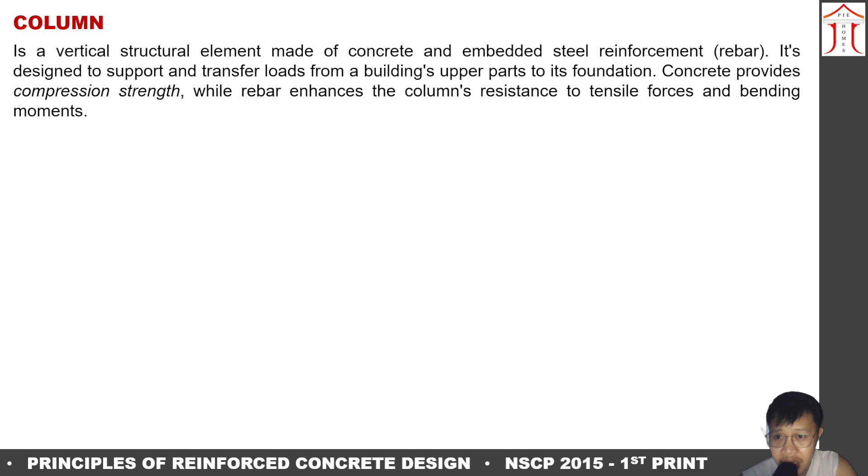Technically, ang column is actually para lang din tong beam, kaya lang vertically naman siya na-align. Just like beam, nakakaranas din ito ng mga tensile forces and bending moments, kaya kailangan din natin itong i-reinforce with rebars para mas maging ductile, para mas magkaroon siya ng resistance sa mga forces na ito. So, there are three common types of failure sa column.

First, we have the compression failure, or minsan ito'y tinatawag na pure compression failure. Kung mapapansin natin, ang column ay nakakaranas ng mga vertical forces, mula doon sa slab papunta sa ating beam, and then from our beam papunta sa ating mga columns. So yung mga loads na yon ay nakikerry o natra-transfer dito sa ating column, at directly na siya dito sa ating pinakaposte. Itong unang type ng column failure ay tinatawag nating compression failure. Ganito ang magiging itsura niya, magkakaroon ng parang bukol dito sa ating pinakakatawan ng poste natin.

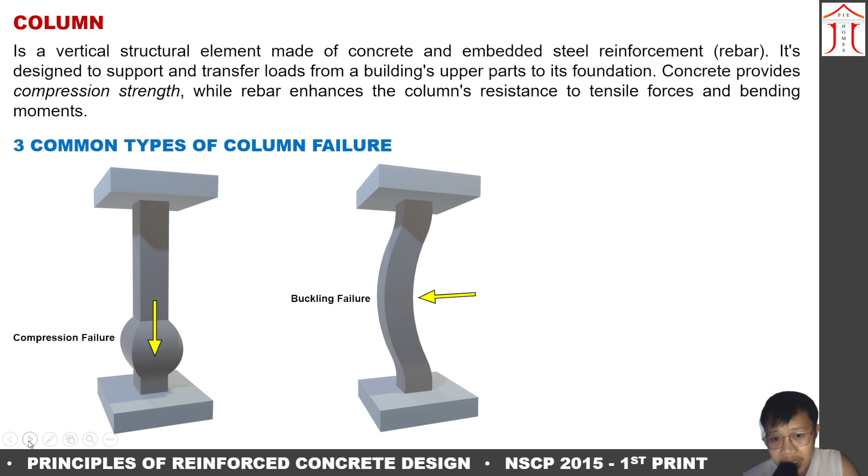And then, the next column failure na meron tayo ay yung tinatawag natin na buckling failure, dahil ito sa bending. And then, the last common column failure natin ay yung tinatawag na shear failure, which is yung pagkasira o pagkahati ng ating column.

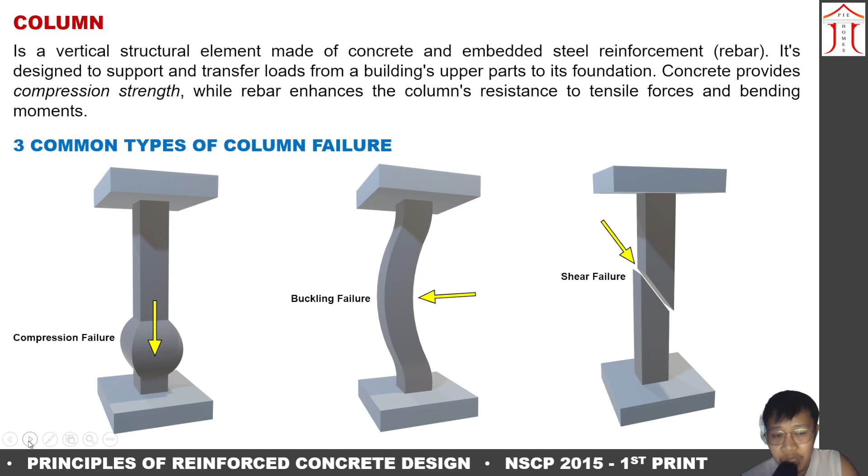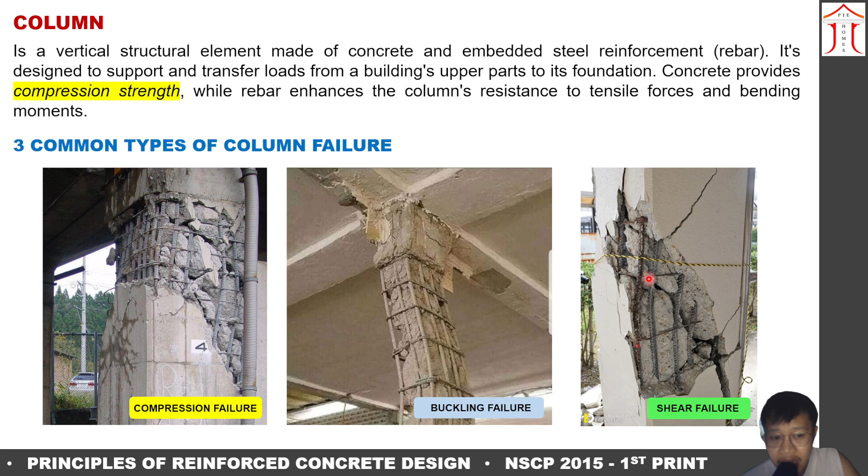Ito yung mga typical na itsura sa actual ng mga failures na ito. Kung mapapansin natin dito sa ating compression failure, parang nabuntis dito sa may bandang gilid-gilid na evenly, circular po yan sa isang location lang. Then for our buckling naman, nagla-letter S na siya, essentially letter S na po yung kanyang shape. And then para naman sa ating shear failure, mapapansin natin dito sa figure, nagkaroon ng crack diagonally. So ito po ay shear failure.

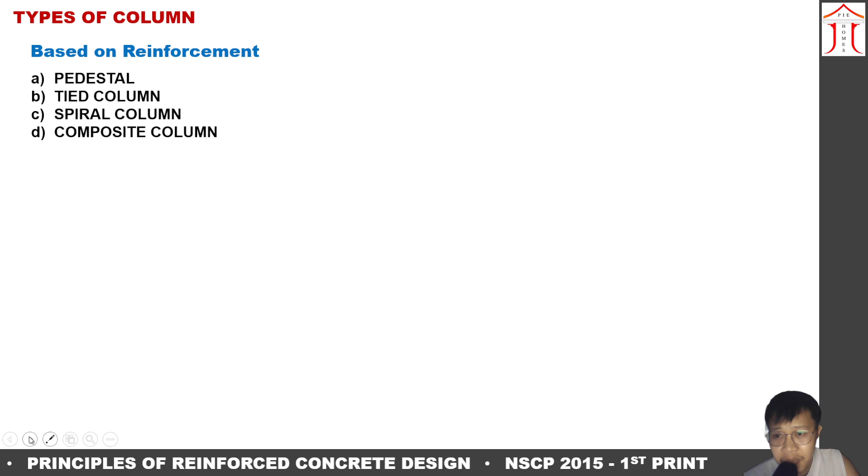Meron din tayong mga types of column. Papangalanan natin ito sa tatlong paraan. First, based on its reinforcement. Meron tayong 4 types ng column based on its reinforcement: first ay pedestal, second ay tied column, third ay spiral column, at ang last ay composite column. For pedestal column, this is defined as it acts as a base distributing the load from the supported element to the foundation. Essentially, ang pedestal sa layman term natin ay isang short column.

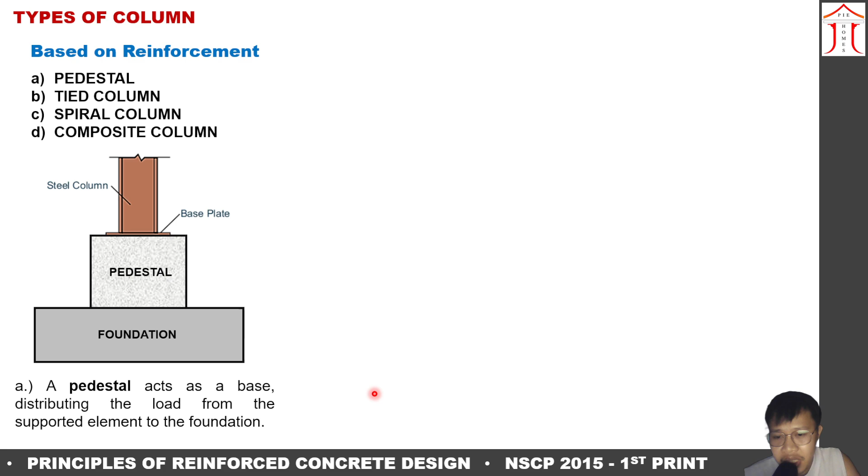Para naman sa ating tied column, by definition, it is a reinforced concrete column where the vertical reinforcing bar o ang main reinforcement ay held together by transverse bars o tinatawag natin na ties, spaced regularly along the column's length. Meron tayong dalawang types ng tied column: circular at square o rectangular na tied column. Yung tawag daw natin dito ay ties na, instead of stirrups, tulad sa ating beam. Para sa column, ties naman na ang tawag natin diyan. Yung ties na ito ay spaced regularly, meron talaga itong mga spacing.

Halimbawa, dun sa plano nakaset doon 3 at 50 mm, or 4 at 100 mm, then the rest at 200 mm. So meron talagang bilang, equally spaced po yung mga iyan. Ito po yung tied natin for a rectangular one, at meron din tayo ditong circular na tied column, equally spaced din po yung ating mga transverse reinforcement dito.

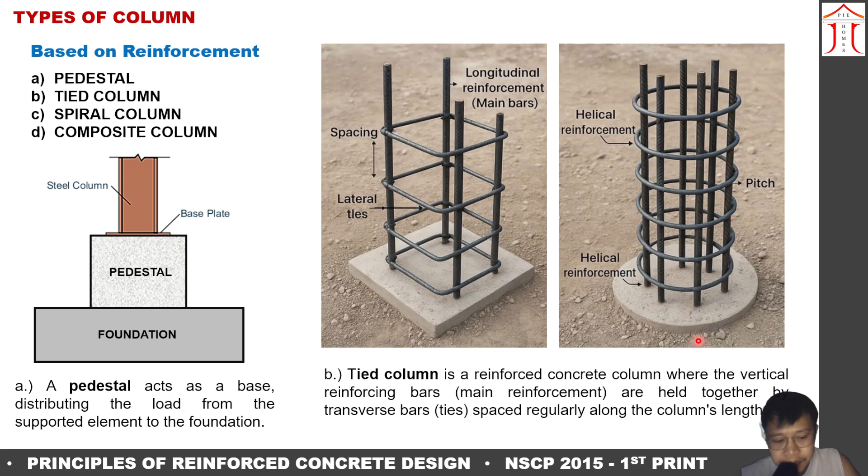And then the next one is a spiral column. Ito ay typically cylindrical shape and have a spiral bar wound continuously around its circumference. Para sa spiral column, ang shape lang nito dapat ay laging cylindrical o circular lang yung kanyang base, at yung kanyang transverse reinforcement ay isang continuous na rebar. Parang dito po nakapulipot na, paikot na po yan dito. Ito po yung tinatawag natin na spiral column.

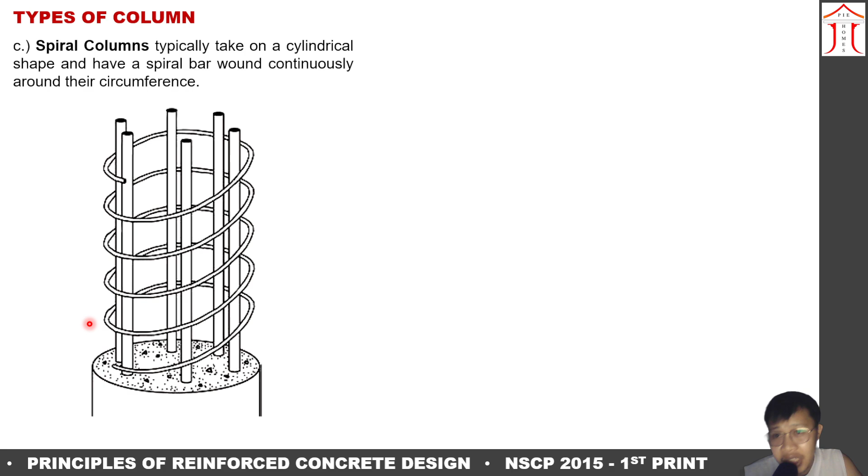And then for composite column naman, this one is a structural member built using two or more different materials to combine their beneficial properties, such as steel and concrete.

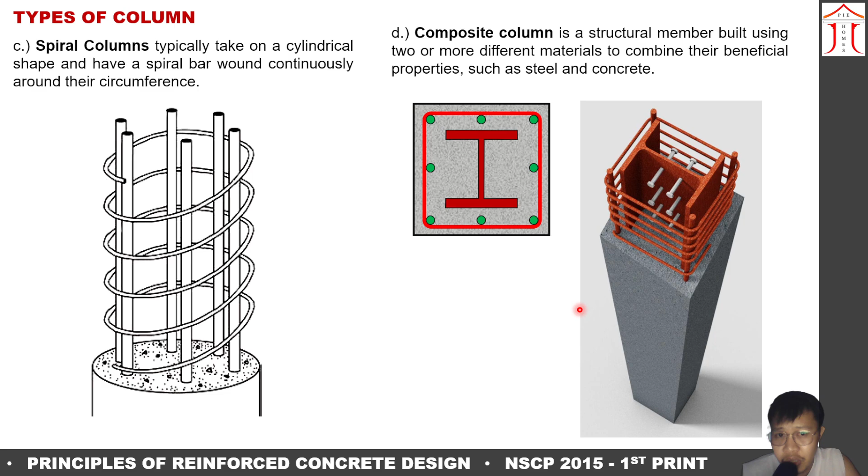So normally, ang ating regular na column, meron lang tayong concrete tapos meron tayong mga rebars. Kapag composite na, dadagdagan natin dito ng structural steel sa loob nito para mas tumibay pa. So yun yung tinatawag natin na composite. It is composed of two or more different materials.

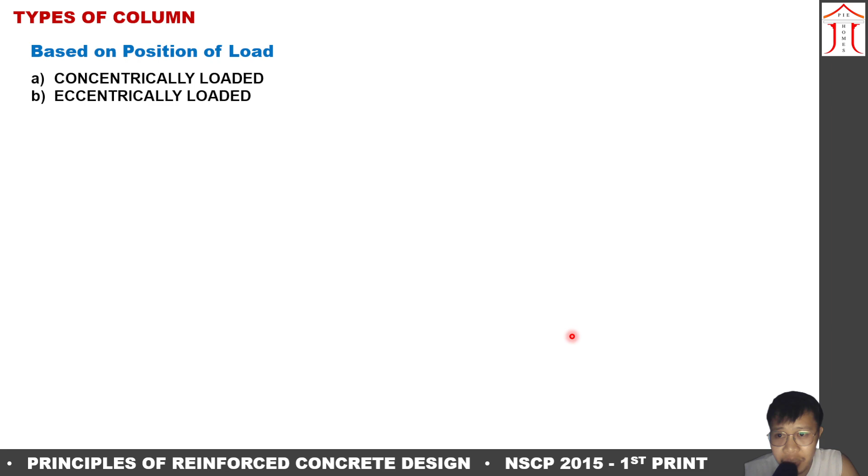Okay, the next criteria naman for type of column is based on its position of the load. Dalawa lang naman ito: it's either concentrically loaded or eccentrically loaded. So ito yung figure natin. For example, when we say concentrically loaded, yung ating axial load ay nag-a-act sa mismong center ng ating cross-section ng column. While kapag eccentrically loaded naman, essentially yung ating axial load ay merong eccentricity from the centroid of our column.

And then the last one naman, based on its length in relation to its section. Dalawa lang ito, short column and long column. Okay, papasadahan natin ito maya-maya lang din. Ang first examples natin or first three examples natin ay puro short columns lang, and then for the next ones ay mga long column na rin.

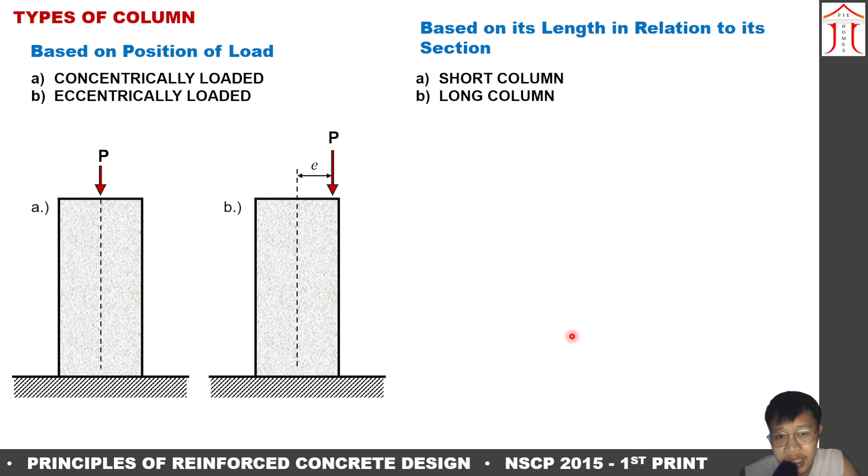Okay, so these are the important provisions for compression strength under our NSCP 2015 na first printing. So ito po yung mga important provisions natin. Basahin na lang po natin ito dahil papasadahan din naman natin ito sa mga examples natin.

Okay, so meron tayo dito, table for axial strength. So, ang conforming, meron tayo ditong PN max na meron factor na 0.8 PO, tapos for spiral 0.85 PO. Ito yung mga importanteng papasadahan natin, kaya naka-highlight po siya dito.

And then also we have here for non-prestressed member, composite steel and concrete, meron tayo ditong PO or yung pure axial natin, na formula. P sub-zero yung meron tayo dito. This is actually equal to 0.85 F prime C, AG minus AST, plus FY AST. I-derive natin to later on.

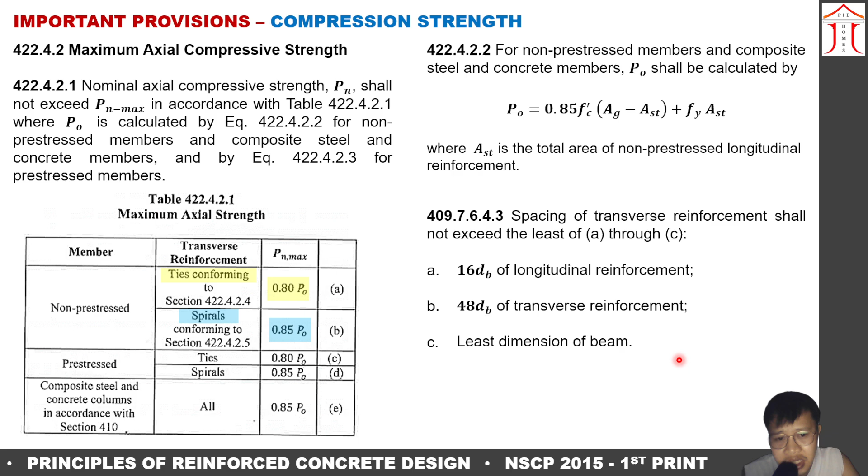Okay, and then another important provisions dito ay yung maximum spacing for our transverse. So meron tayo ditong 16 dB for longitudinal, 48 dB for our transverse, and then the least dimension of the beam. And then reinforcement limits, meron tayo ditong 0.01 AG but not more than 0.08 AG.

Actually, ito po yung tinatawag natin na steel ratio. At saka meron din tayong steel ratio para sa composite column, from 0.01 quantity of AG minus ASX but not exceed 0.08 AG minus ASX.

Okay, and then also longitudinal reinforcement. Ito yung mga minimum numbers of main rebar natin for a type of column. So for example, triangular yung ating column, so meron din siyang triangular na ties. Dapat meron tayong at least 3 rebars, main rebars. And then kapag rectangular or square yung ating column, at least 4 rebars. And then for enclosed spirals, kapag spiral meaning circular, at least 6.

Balikan natin dito sa may B. Sabi dito, rectangular or circular, provided na tied column ito, 4 daw yung ating minimum na bakal for our rebar, main rebar. Okay, and then the spacing naman ng longitudinal bars natin, ito yung minimum. It's either, the greatest among the 3: 40 mm, 1.5 diameter of the bar, and 4/3 diameter of the aggregates.

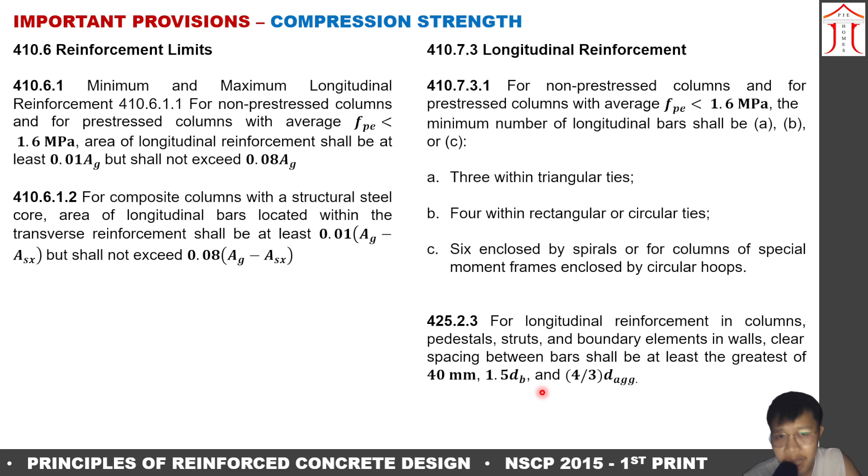Okay, and then ito yung mga other formulas pa natin for our spiral. Okay, for load capacity, example, meron tayo ditong PO, okay, or yung ating pure axial na tinatawag, P sub 0, pure axial, ibig sabihin nito sa sentro talaga nag-a-act.

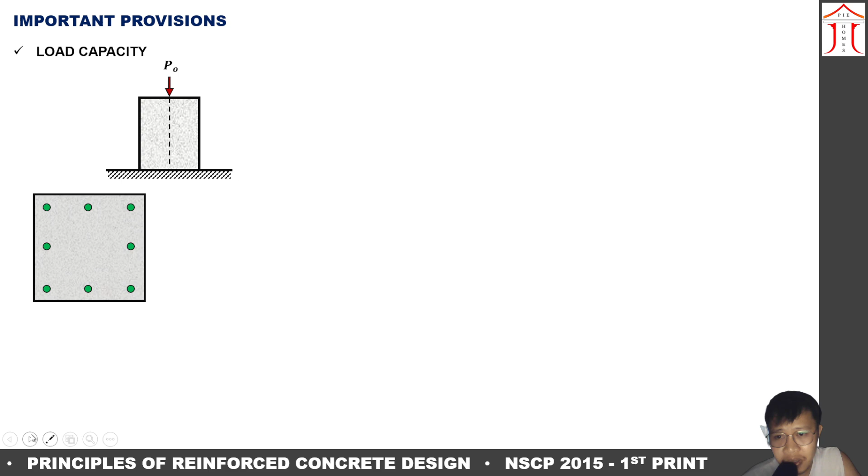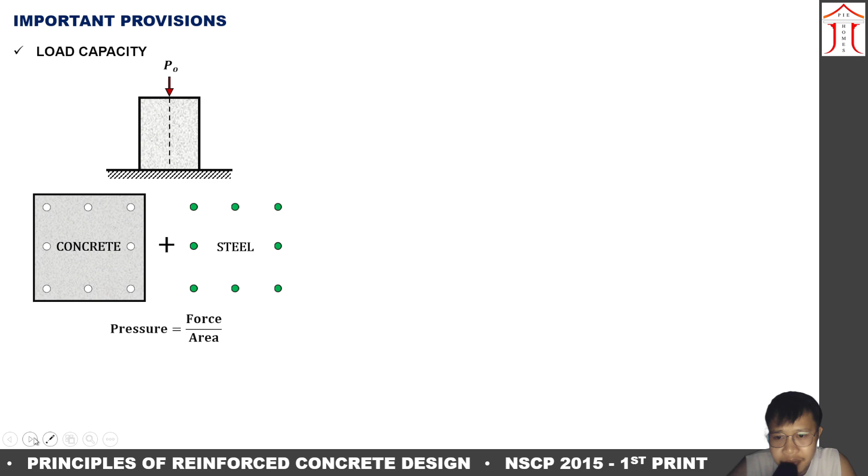Imagine ito yung ating cross section ng ating column, okay, and then try nating ihiwalay yung kanyang main rebar. So ito, meron ng butas dito, nilabas natin yung kanyang rebar. Ihiwalay lang natin ito. So meron na tayo ditong concrete and steel. From pressure formula lang natin ide-derive yung formula nung P sub 0 kanina.

So we know that pressure is actually equal to force divided by area. Then mag-derive tayo for concrete and steel, kasi ito yung main material ng ating reinforced concrete column. For concrete, it is already defined nung sa beam pa lang natin that the pressure of concrete is 0.85 F prime C, or yung compressive strength ng concrete natin. And then this is equal to yung force natin, tawagin nating F sub C, and then the area.

Na nako-compress dito sa concrete ay the gross area minus yung area occupied by the steel. Kaya meron ditong minus. Yung buong concrete minus yung butas, yun yung ibig sabihin nito. And then for our steel naman dito, again yung pressure o yung stress na nararanasan ng steel natin ay yung mismong kanyang yield stress, that is the Fy. And then this is equal to yung force natin, tawagin nating F sub S, divide that by the area of the steel, AST. With that, pwede na natin kunin yung value ng P sub 0.

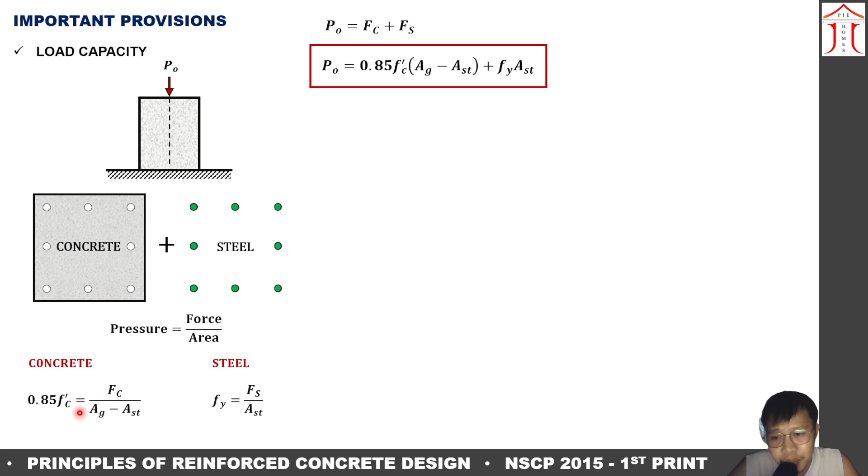That is actually equal to the concrete strength plus the steel strength. P sub 0 is equal to F sub C plus F sub S. So definitely, substitute natin lahat. F sub C natin dito, cross multiply, 0.85 F prime C times the quantity AG minus AST. Ito yung first term natin. Tapos ang Fs natin ay Fy times AST, yung second term lang natin. Ito po yung derivation niya.

Napakasimple, napakadali. And then pwede rin nating i-derive or i-rewrite yung P sub 0 na ganitong formula. Saan to galing? Take note that we have steel ratio for column, that is equal to area of the steel divide by the area of the concrete column, gross area ng concrete column. Area ng steel divided by area gross is equal to rho. Dito, ginawa, ang AST daw ay equal to rho AG. Sinubstitute lang dito yan sa lahat at sinimplify. Pwede mong memorize ito kung gusto mo, pero para sa akin okay na yung dito sa kabila, o dito yung nasa taas.

And then we have nominal load din. So for our nominal load, meron tayong dalawang values. Ayon sa naka-table kanina na highlighted, kapag tied column, ang multiplier natin na factor para sa ating P0 ay 0.8. Ulitin, for tied column, factor natin ay 0.8 dito sa pure axial load natin. At para naman sa spiral, ang multiplier natin ay 0.85.

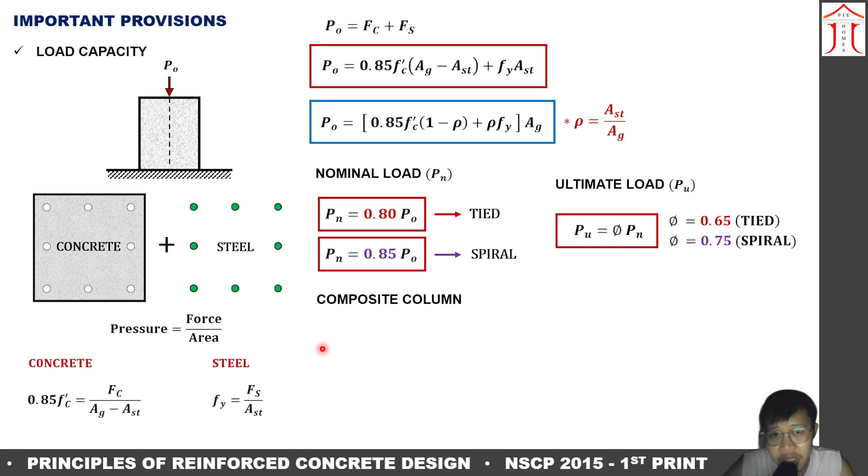By the way, itong P sub 0 na dinerive natin, kung mapapansin natin, ay column plus concrete plus rebars lang siya. What if composite column po siya? Ibig sabihin meron tayong idadagdag na structural steel element sa may gitna. Para sa structural steel, ang gagawin lang natin dito, mag-derive lang din tayo ng kanyang formula. Pressure is equal to force over area.

Ngayon, ang pressure para sa structural steel ay capital Fy, yield stress lang din ito, pero tawagin natin capital Fy. At ito ay equal to FSS, meaning force ng structural steel divided by the area of the structural steel. Tawagin natin yung area ng structural steel as ASX. At finally, yung P sub 0 natin, dahil meron na tayong dinagdag na structural steel element, dagdagan lang din natin ng plus FSS. I-rewrite natin yung kaninang formula natin, idagdag lang natin sa dulo yung FYASX.

Napakasimple po nitong formulas natin.

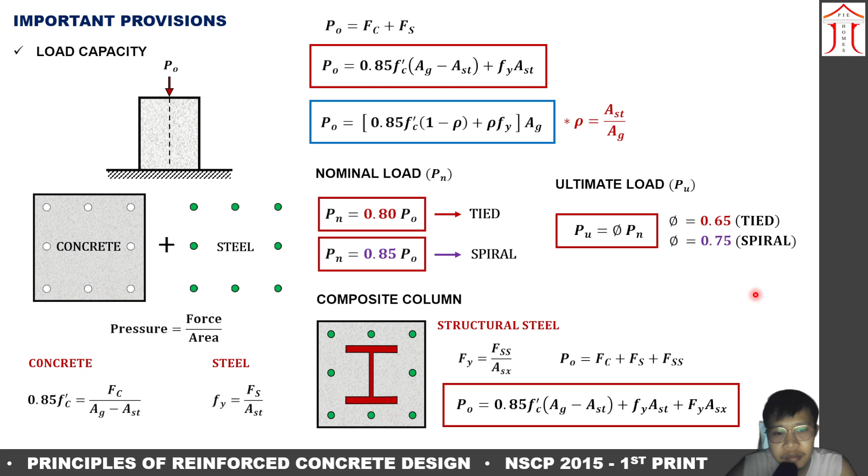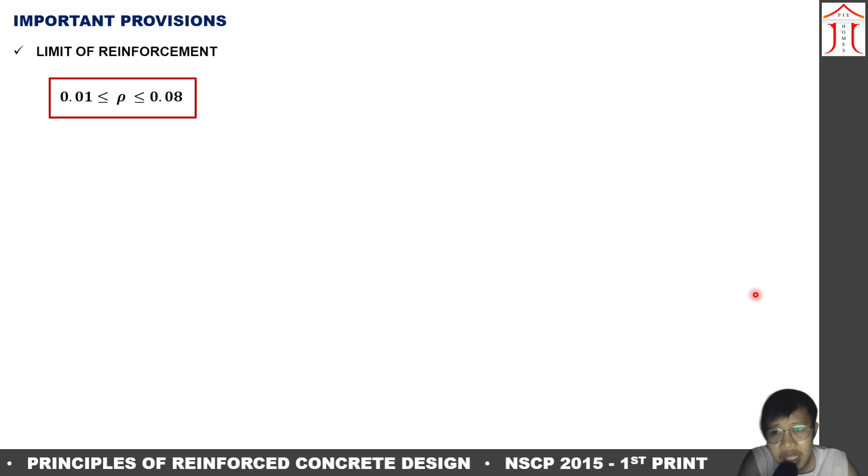Next, we have here limit of reinforcement. Meron daw tayo ditong steel ratio for column na equal to or greater than 0.01, but less than or equal to 0.08. Ano ang ibig sabihin nitong limit of reinforcement? Itong steel ratio natin ay equal to area of the steel divided by the area gross cross-sectional of the column. Sinasabi sa atin ng NSCP na up to 1% of the gross area lang yung minimum reinforcement natin, at hindi natin pwedeng lagpasan ang 8% ng gross cross-sectional area. Hindi tayo pwedeng bumaba sa 1% ng gross cross-sectional area at hindi tayo pwedeng lumagpas sa 8% ng gross cross-sectional area. That is our limit.

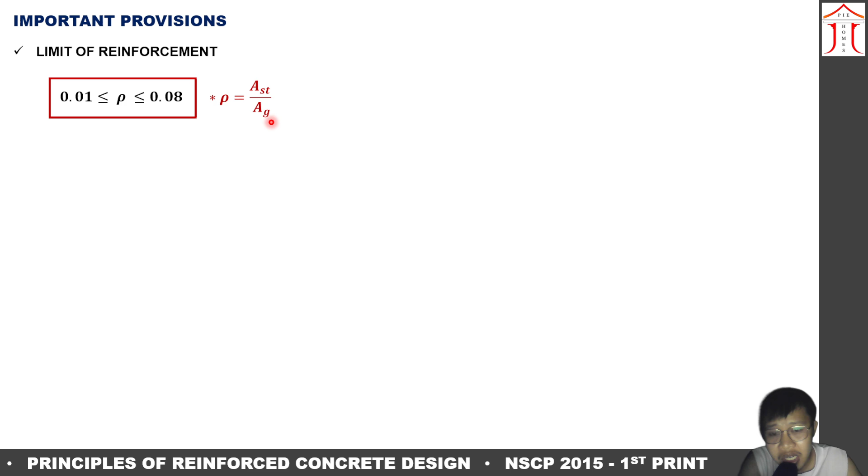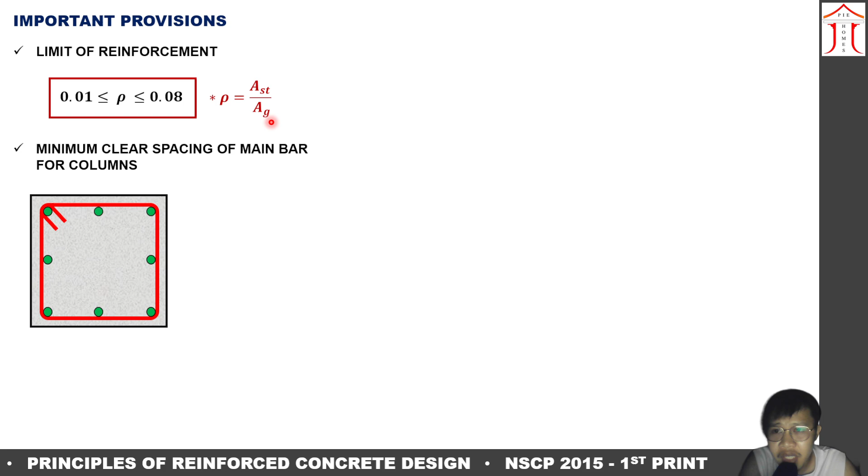Then we also have here minimum clear spacing of the main bar for columns. Imagine we have here a column with reinforcement. Sabi dito, ano daw yung dapat na spacing ng mga rebars natin? Clear spacing, ito yung mga clear spacing natin, edge to edge ng bawat main rebars natin. Sabi ng ating NSCP, we choose the greatest among the three: 40 mm, 1.5 times the diameter of the rebar, or 4/3 times the diameter of the aggregates. Whichever is greater, siya yung mag-gogovern dito.

Ano ang ibig sabihin nito? Hindi po tayo pwedeng bumaba sa pinakamataas na value nito. Bakit? Dapat yun yung pinakamaluwag na espasyo ng ating mga rebars. Ang purpose lang po noon, kapag binuhusan natin yung ating column, ay hindi po magbabara yung mga bato. Kailangan po medyo maluwag pa rin yung pinakamaliit na spacing natin ng mga rebars: 40 mm, 1.5 dB, 4/3 diameter of the aggregate. Itong diameter of the aggregate, average na lang yan. Itong D sub B na capital, ito yung diameter nung main rebar natin.

And then 40 mm, whichever is greater. So kung meron tayong minimum, meron din tayong maximum. Yung maximum na spacing ng mga rebar natin, clear spacing, is 150 mm or 6 inches.

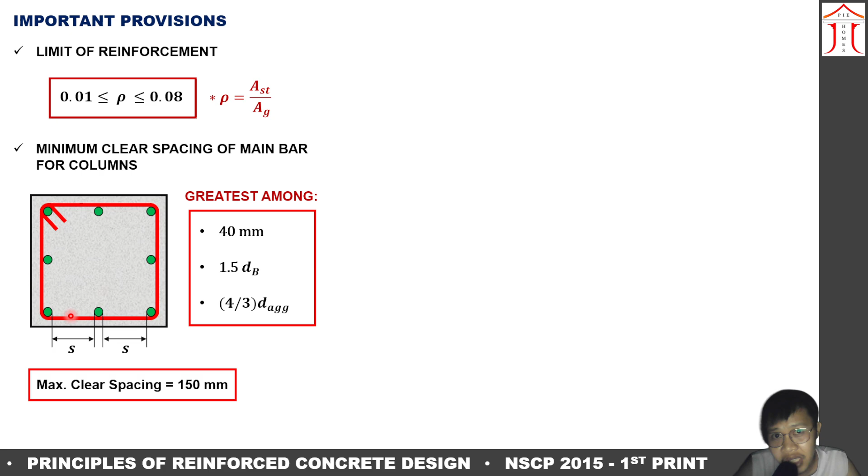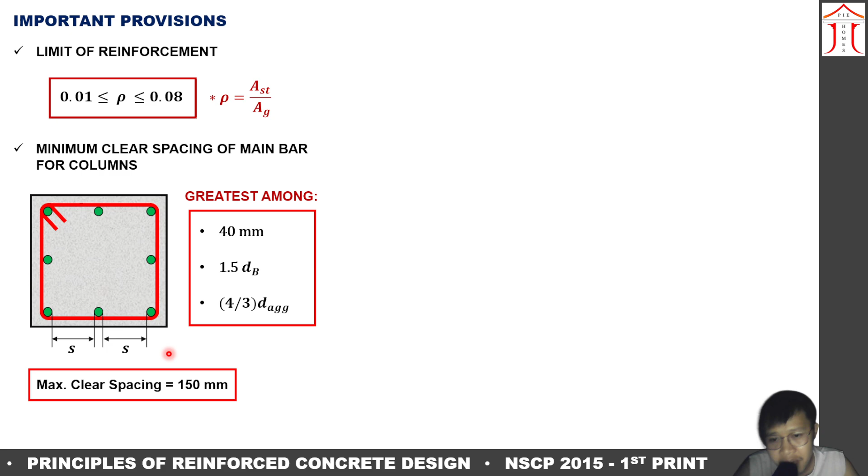So anong ibig sabihin nito? Kunyari, yung main rebars natin dito sa left at dito sa kabila ay 160 mm. Ang ibig sabihin nun, bawal na yon. So meaning, kailangan mong magdagdag sa kanilang gitna. Bawal tayong lumagpas sa 150 mm, i-limit na natin sa 150 mm.

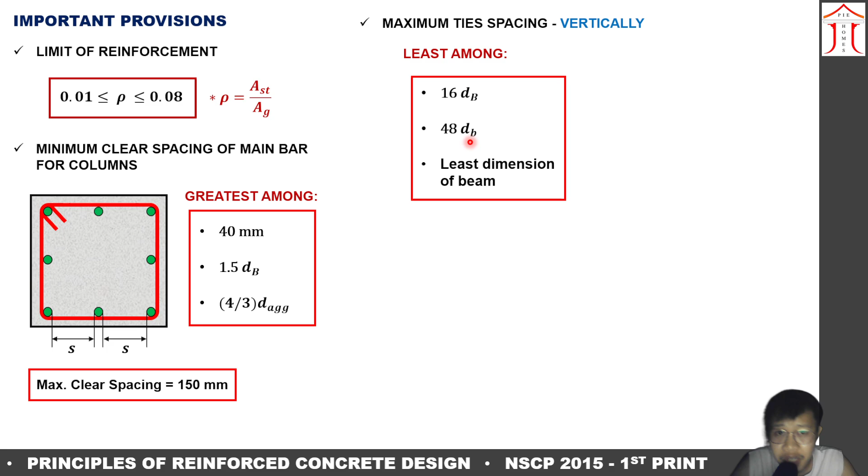Yun yung clear spacing ng mga main rebars natin. And then also we have maximum tie spacing. Hinati ko to sa dalawa: we have vertical spacing, then meron tayong horizontal spacing of the ties. We only choose the least among the three given formulas: either 16 diameter of the main bar, 48 diameter of the transverse rebar, or the least dimension of the beam.

Kunyari, ito yung tied column natin na rectangular, and we have here spacing of our ties. Sabi dito, yung maximum na spacing na yan ay yung pinakamaliit among the three: yung diameter of main bar, ito yung ating transverse, and then the least dimension of the beam.

So ano tong least dimension of the beam? Say for example, merong beam sa bawat faces ng column na to. Kung sino man yung may pinakamaliit na width doon, siya na yung gagamitin natin na least dimension of the beam. Kung dalawang beam lang yung nakakabit dito, whichever is lesser, yun yung magagovern. Kung tatlo, whichever is lesser. Ganun lang po.

And then also, kung meron tayong vertical spacing ng transverse, meron din tayo ditong horizontal spacing. Actually, ito yung top view ng ating transverse rebar. Say for example, we have here a rectangular na column with reinforcement given na, at ito yung mga spacing po ng ating mga rebars.

So pasok po tayo dito sa maximum clear spacing. Less than 150 po lahat, so goods po ito, tama? And then ito yung ating main stirrup, yung pinakalabas pa. Alam natin o nakakita na kayo siguro ng mga plano. Mapapansin nyo, meron pa yung mga bakal na parang may pa-diamond pa, may mga C-bar pa tayo sa gitna.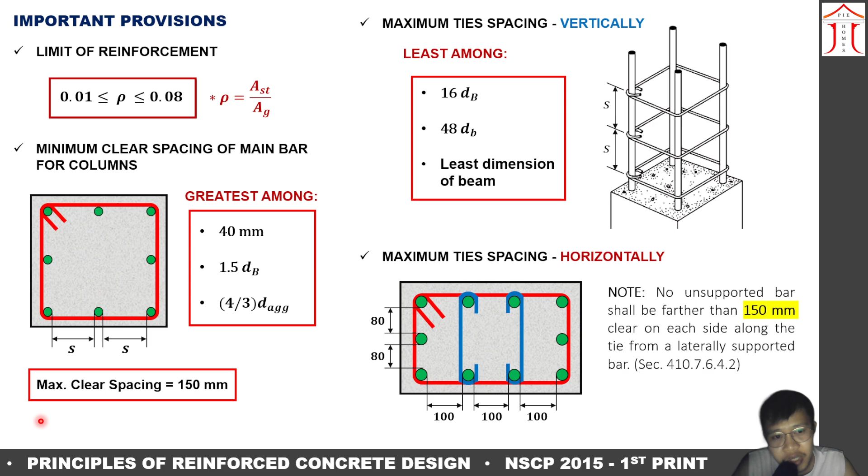Okay? So, yun po yung ibig sabihin nito. Okay, and then next, the minimum number of main rebars. So, again, ito yung sinabi natin. Kung triangle, meron tayong 3. Kung rectangular, meron tayong 4. Circular man siya o rectangular, basta ties, 4 siya. Kapag spiral, which is always naman na circular, 6 ang minimum na bilang.

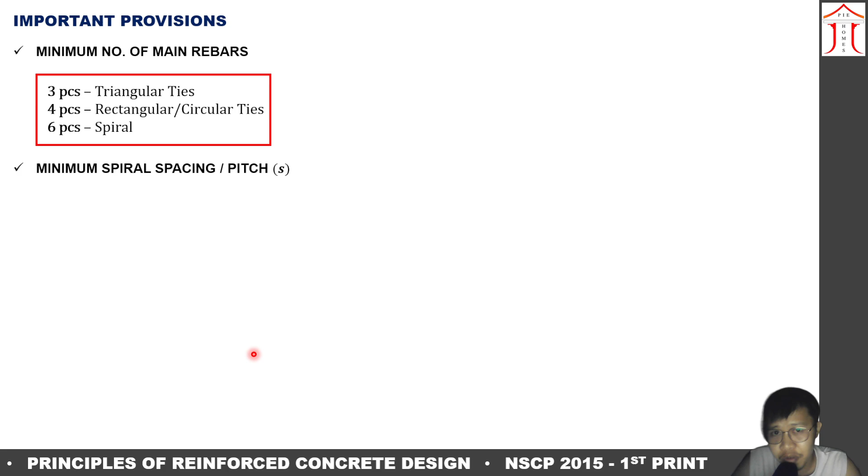Okay, next, minimum spiral spacing or pitch. So, meron na tayong tied kanina. Ano yung kanyang maximum spacing? Of course, pag-usapan din natin yung sa spiral. Okay? Ano naman daw dito yung maximum na pitch natin? So, saan yung pitch dito? Okay? Ang pitch dito ay yung isang whole turn nung isang transverse stirrups natin para sa spiral.

For example, ito kunyari yung ating starting point. Okay? Iikot tayo dito. Tapos, makakabalik tayo dun sa ating tapat nung ating starting point. Okay? Dito tayo nag-start, umikot tayo, and then nakarating na tayo dito. So, that's one pitch. Or actually, ito na yung tinatawag natin na pitch spacing. Okay? Isang buong turn. Okay?

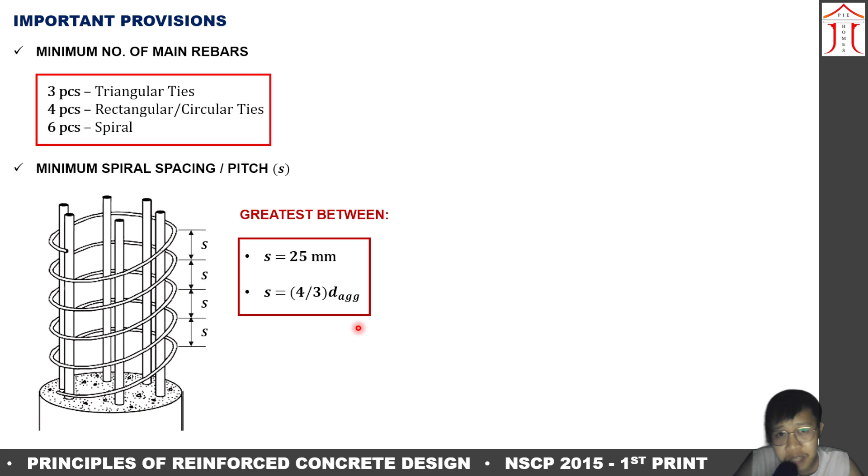So, ano daw yung kanyang maximum or minimum, no, na spacing? That is actually the greatest between the two. 25 mm or the 4/3 diameter of the aggregates. Whichever is greater. Okay? Pag yan po, no? So, spacing po nitong mas malaki, mas safe po, no? Para hindi maipit yung mga bato if ever na sakali man buhusan ito, no? Then, kung meron tayong minimum, of course, meron din tayong maximum. Hindi tayo pwedeng lumagpas sa 75 mm. Okay?

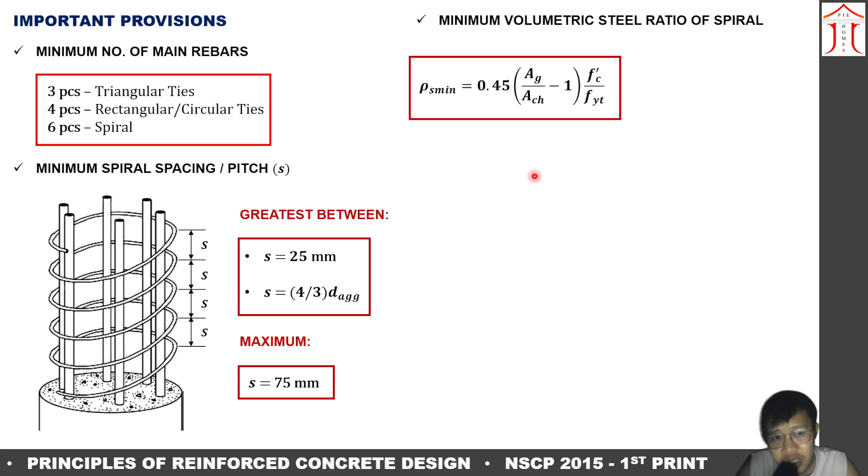And then, next, we have this, another formula or parameter, no? Volumetric steel ratio ng spiral. So, ito yung given formula kanina dun sa ating code. The rho spiral minimum, that is rho S minimum, that is equal to 0.45 area gross divided by area CH or the core of the concrete minus 1 times quantity F prime C over Fy. Okay? So, nasaan yung minimum volumetric steel ratio natin?

So, for example, ito yung isang pitch natin. Okay, so yung dito na banda, no? Isang volumetric steel ratio ng isang spiral. Okay, and then we also have here yung actual na spiral steel ratio natin. So, by words, ang steel ratio daw natin for spiral ay the volume of the spiral or the pitch divided by the volume of the concrete core. Ayan, so parang dito lang din, no? Pwede kang mag-consider ng isang pitch lang or pwedeng lahat ng pitch, no? Isang buong column consider mo. Okay lang naman yan. Okay? Same naman yan, no? Kung yung height lang yung difference, magka-cancel lang naman yan.

However, hindi nyo na ito kailangan i-memorize, no? Dahil ang provided na formula sa atin dito ay meron din. The steel ratio for the spiral is actually equal to 4AS times quantity DC minus diameter of the spiral divided by S diameter of the core, concrete core, square.

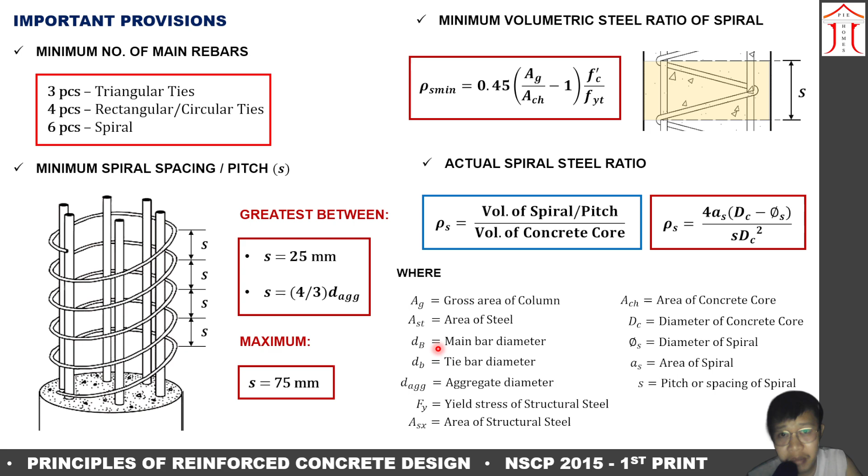Alright? So, ito yung mga definitions po nung mga parameters natin. Okay? So, AG, the gross cross-sectional area, area of the steel. Okay, again, kapag capital B, that is the main rebar, and then for smaller b, that is the tie rebar or the transverse rebars or stirrups kung sa beam naman. Diameter of the aggregates, yield stress of the structural steel, area of the structural steel, area of the concrete core, diameter of the concrete core, diameter of the spiral reinforcement, area of the spiral, and then the pitch or the spiral spacing. Okay? So, ito po yung mga provisions natin.

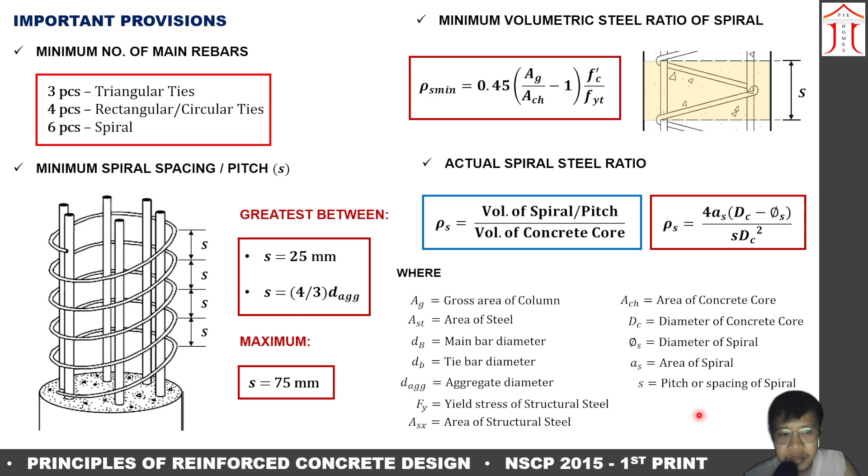Then, we can now have our example number 1, 2, and 3 on the next part of the videos.